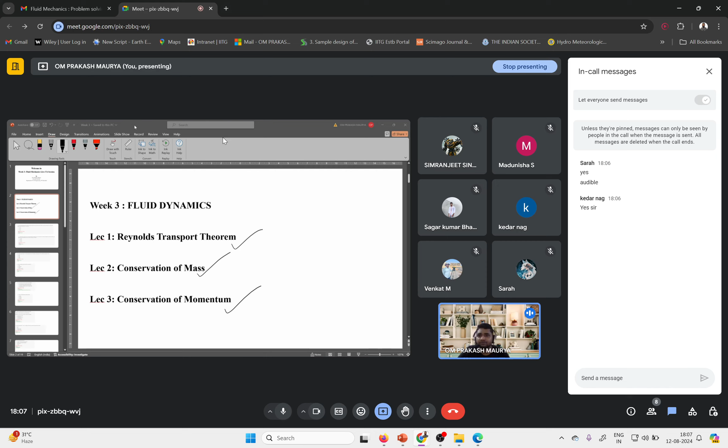So let me share the question and answer first. Hope question 1 is visible to all of you. The control system focuses on a blank, on control volume focuses on a blank, filling the blanks.

So here option A and B are given. Option A: set of fluid particle in the first blank, and region of space surrounded by control surface in the second blank. Option B: region of space surrounded by control surface in the first blank, and set of fluid particle in the second blank. So please, based on your understanding of week 3 content, try to give the answer of this question. You can write the answer in the chat box whether option A or B is correct.

Here the question is about control system and control volume. This is the very basic thing which belongs to your Reynolds transport theorem. So if you have any idea, please write in the chat box. I think sir has explained very well what is control volume and control system in the class or NPTEL online classes.

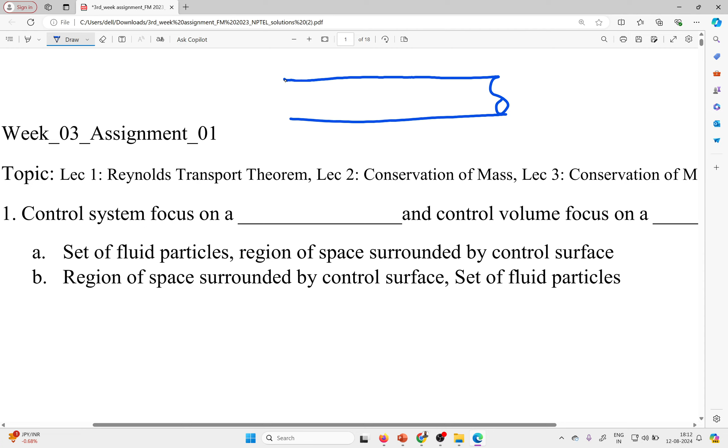Okay, let me discuss the answer. So basically a control system and control volume is nothing but, let me draw a pipe first. Let me select the pen first. Okay, so if I draw here a pipe, why it is like that? And a student wants to calculate velocity at this particular point, so there are two ways of calculating, and water is flowing from this side to this side.

So let's suppose this is point A. So velocity at point A, what is the value of velocity at point A? There are two ways. First, this water particle is moving, you need to track a particular set of particles as it moves to this place, and you need to calculate velocity. So this is one way.

Second way, you focus on a particular region. Let us suppose you select a region. When fluid particles come at the particular point, lots of fluid particles go in and out from this particular region. So you need to focus only on this region, not move from inlet up to that point, and you can measure velocity in that section only. So this is another way to calculate.

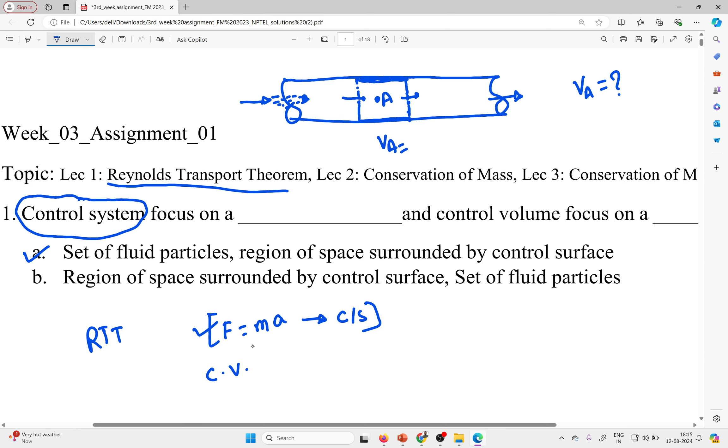Your Reynolds transport theorem, what does it do? Whatever your fundamental equations are given, like force equals mass into acceleration, this is based on your control system. But in fluid mechanics, generally we use the control volume approach. So how will we use this formula? This formula is converted from control system to control volume using RTT. So you can say control system is converted into control volume by RTT, Reynolds transport theorem. Always please remember this concept. So this is all about your control system and control volume. Hope you people got what I was trying to say.

Let us move ahead with the next question.

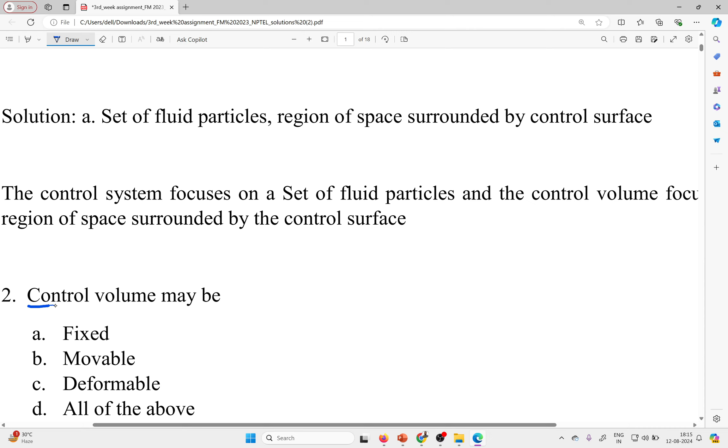So okay, question 2 is: control volume may be fixed, movable, deformable, or all of the above. So this is the second question. Please try to give your answer based on your previous lectures, for question number 2.

Okay, Sagar is telling option D. Okay. Other students, please also try to say. All students have 2 minutes. Within 2 minutes, please try to give the answer to this question. Okay, Kedar is telling option A. Okay.

I want to say one thing more about the control system approach. In a control system, fluid identity should not be changed. Fluid identity means whatever group or set of fluid particles you have considered, those particles should not change. In a control volume, one particle comes in, another particle goes out, so the identity of particles is changing. But in the control system, whatever group of particles you selected previously should not be changed. So this is the fundamental concept behind control system and control volume.

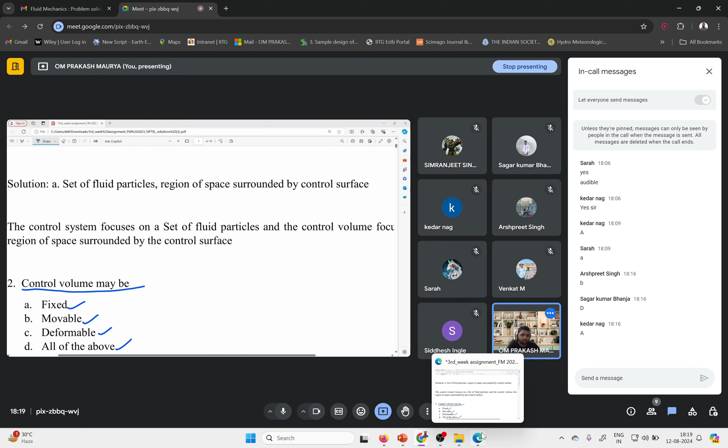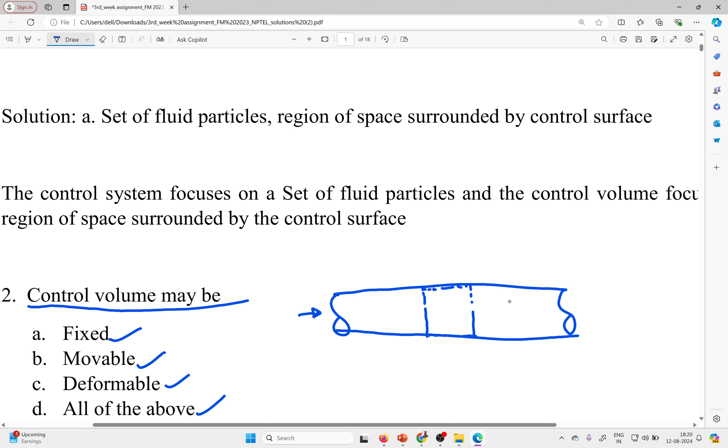So only two students answered. Okay, let me discuss. So control volume may be fixed, like in the previous questions. Let me draw. You may select a region here. Maybe your region is shifted from here to here also. It depends on which type of study you want to do. If you want to move your control volume, then it is possible. After time t1, after time t2, your control volume may be shifted here.

But in a control volume, new particles are coming in and going out, not like the control system. It may be deformable. The shape is like this here, and maybe the shape will be different here. It depends. So all options will be correct for that.

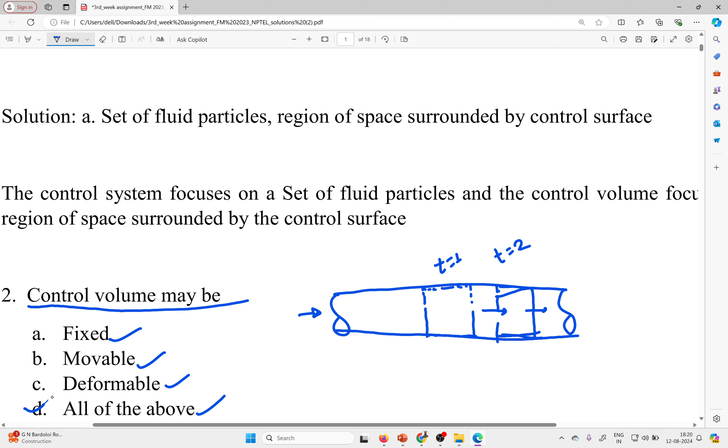Let me discuss the control system. Your control system also may be deformable, may be movable. It is movable, but it may be deformable also. If your group of particles is like this, after some time, after traveling a certain distance, it may be like that. So your control system is also deformable.

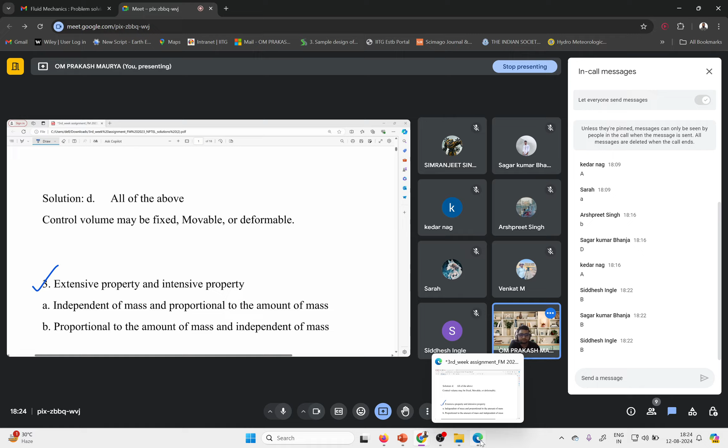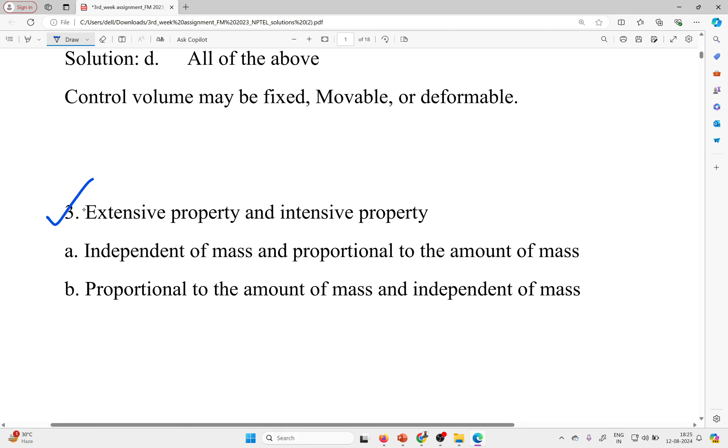So your extensive property depends on your mass. Your extensive property is, as the name suggests, extensive and intensive. Extensive means it is proportional to, it depends on mass, and intensive means it is independent of mass.

Like your density, rho, it is independent of mass. Weight depends on mass because weight is equal to m into g. Density is equal to m by v. So in the formula mass is there, but it is independent of mass.

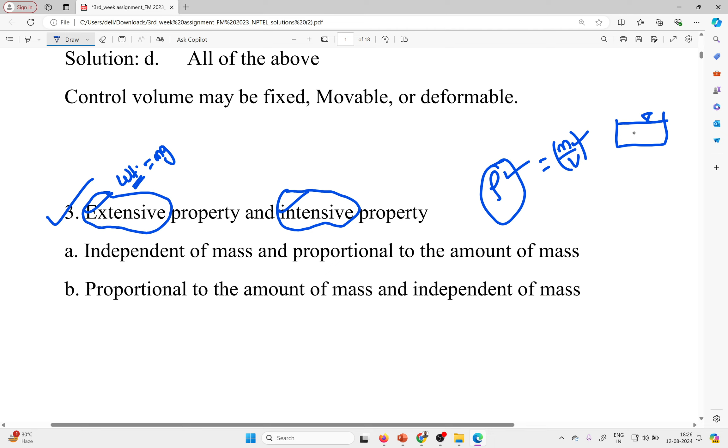Because without mass you cannot expect weight, but density, whatever water you take, let's suppose 100 liter, or you take 1 liter, your density will be the same: rho of 100 liter H2O and rho of 1 liter H2O, density will be the same. So remember, and you can read the explanation also, it is written very well.

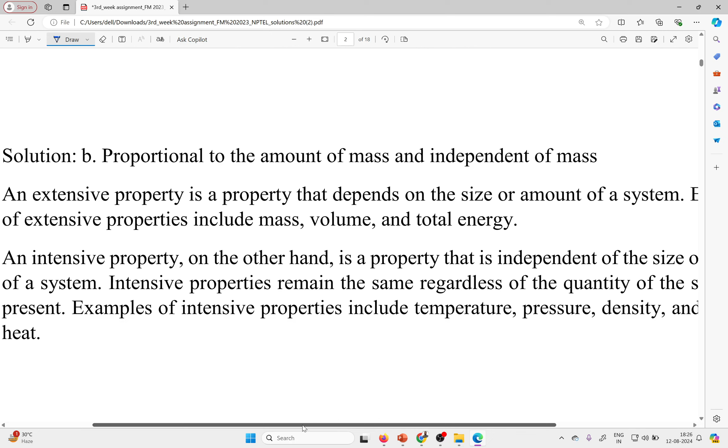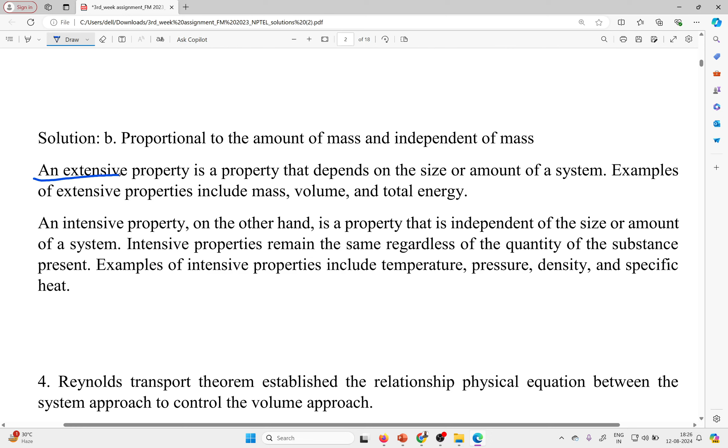So okay, an extensive property is a property that depends on the size or amount of the system. Examples of extensive properties include mass, volume and total energy. An intensive property, on the other hand, is independent of the size or amount of the system. An intensive property remains the same regardless of the quantity of substance present.

Example, whatever I have given, the example of H2O. Examples of intensive properties include temperature, pressure, density and specific heat. So hope you understand.

So now the next question is: Reynolds transport theorem establishes the relationship between the system approach and the control volume approach. So question number 4. Please try to give your answer in the chat box for question number 4.

Hope everyone got the previous question's answer. Okay. Sagar is saying option A. Okay. Just a few minutes back I gave some explanation about this question. So I need the answer from everyone. Please write your answer in the chat box, because just a few minutes back I explained the Reynolds transport theorem and the system and control volume. So really I need the answer from everyone.

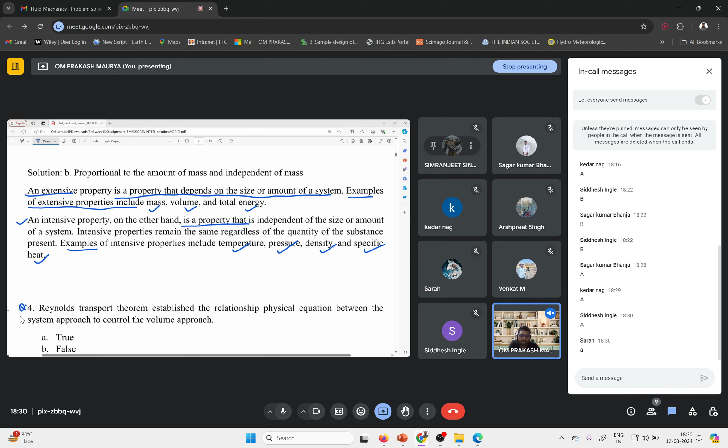Okay. Kedar is also saying option A. Other students please also write your answer. Okay. Siddhesh is saying option A. Okay, everyone is saying option A, which means option A is correct, because a few minutes back I explained it. So we'll move ahead to the next question, question number 5. But if you want to read the detailed answer, what is actually written:

The Reynolds transport theorem establishes the relationship between the derivative of an extensive property of a system, remember, an extensive property depends on mass, and the derivative of the same property within the control volume. It provides a way to convert between Lagrangian and Eulerian approaches. Let me discuss here for a few minutes.

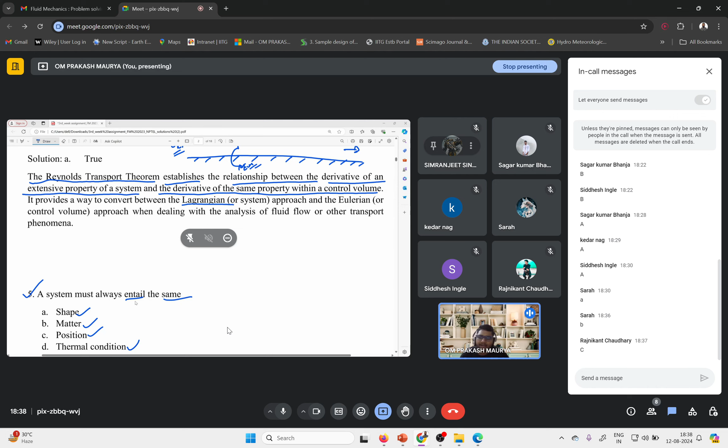So let me discuss the answer of this question. A few minutes back I was discussing the same thing, the control system. If you want to measure a velocity at a particular point or anywhere, in the system approach you will select a group of particles, and the identity of this group of particles should not be changed. The same group of particles is moving here, the same group is at this particular point, not another group; no other particle is going inside this set of particles.

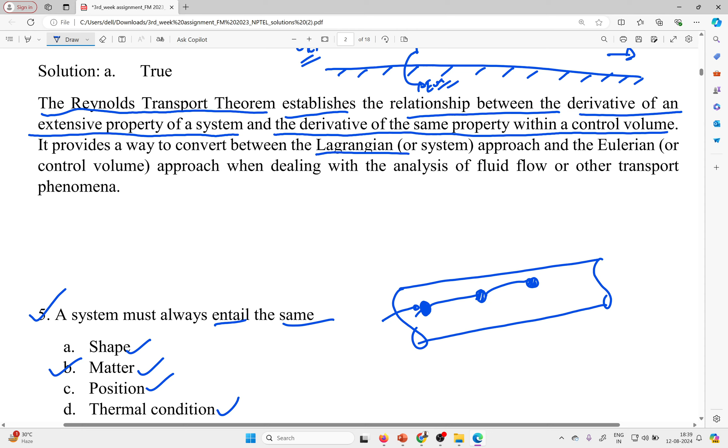So the system must always entail the same matter. Remember please, position may change. Shape may also change. I was discussing previously also, the control system may change the shape. Thermal condition definitely can change. So option B will be correct. Remember always. So let me move ahead to the next question.

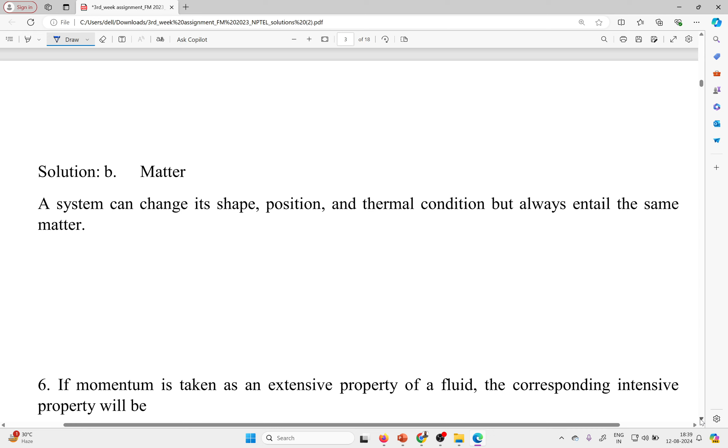Next question is about extensive property or intensive property. If momentum is taken as an extensive property of fluid, the corresponding intensive property will be what? If you know the formula of momentum and what is extensive and what is intensive, which I just discussed, you can link that concept with your momentum formula and easily give your answer. Which option will be correct: mass, energy, velocity, or power, A, B, C, D?

So please write your answer. Please read the question very carefully, then try to give your answer in the chat box. Okay, Rajnikant is telling option A. Sarah is also telling option A. Okay. Other students, please also try to give your answer.

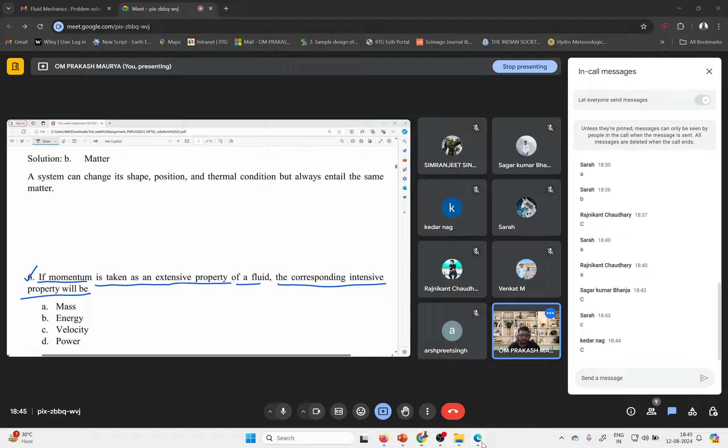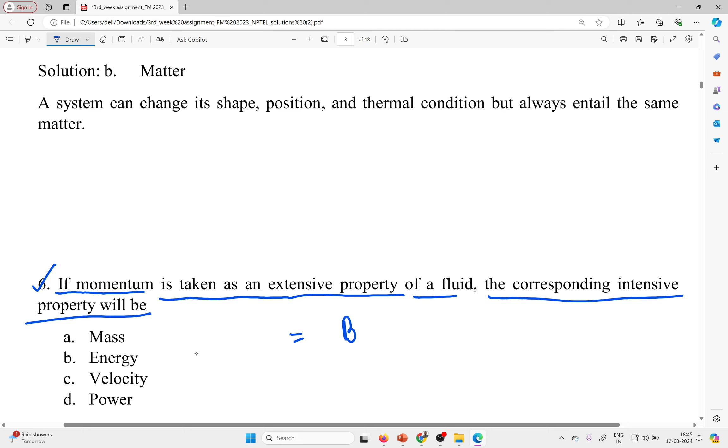Okay, let me discuss. What is extensive and intensive? Let us suppose a property B is an extensive property. What will be the intensive property? Intensive means independent of mass. If any property has mass, you need to divide that property by mass, then you will find that property as an intensive one. If you have an extensive property B, when you divide B by mass you get beta. This will be free from mass.

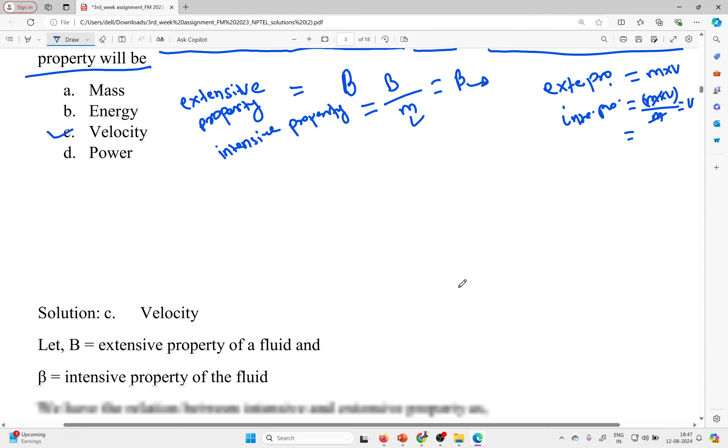So similarly, your extensive property given is momentum, mass into velocity. So the corresponding intensive property will be mass into velocity divided by mass, which gives velocity. So the intensive property of momentum is velocity. Option C will be correct. Everyone is correct. Now moving ahead to the next question. Here is the explanation.

The next question, number 7, is on the momentum conservation principle. The momentum conservation principle is based on the physical principle of: zeroth law of thermodynamics, Newton's first law of motion, first law of thermodynamics, or Newton's second law of motion. Please everyone try to answer. You have three principles: mass conservation, momentum conservation, and energy conservation. Always remember what principle each is based on, and what is the physical meaning of all three conservation laws.

Everyone has 2-3 minutes. After 2-3 minutes I will discuss the answer, so in between please write your answer in the chat box. Okay, Kedar is telling option D. Other students, please. Venkat is telling option D. Rajnikant is also telling D. Arshpreet is telling D. Okay.

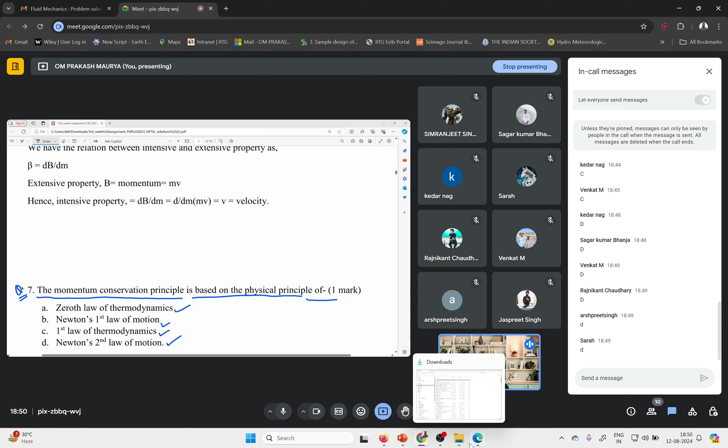So now moving ahead on the next question. The continuity equation, this is a very basic question. The continuity equation is based on the conservation of... you have only 1 or 2 minutes to answer. Please give your answer very quickly. Which option will be correct?

Okay, Kedar is telling option C. The answer of this question I want from everyone please. Everyone please write the answer. The continuity equation is based on the conservation of energy, momentum, mass or force.

Okay, everyone telling C. Kedar, Sarah, Jaspreet, other students please. Okay, Venkat is also telling option C. Sagar also telling option C. Okay. So everyone telling option C.

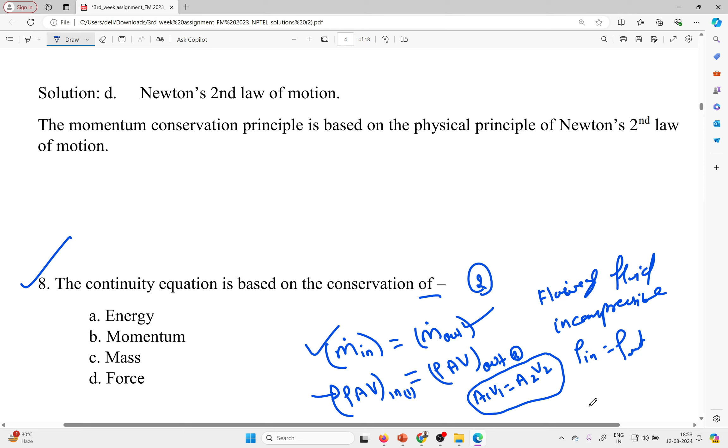So now moving ahead on the next question, question number 9. The continuity equation is valid for only compressible flow, only incompressible flow, both compressible and incompressible flow, or neither flow. Please try to give the answer of this question, as I have just previously discussed.

So if anyone... okay, Kedar is telling option C, no, okay, Kedar is telling option B. So if anyone listens to my words very carefully, then you can very easily give the answer. Okay, Kedar is telling B, Sarah is telling C, Kedar and Sagar is telling B, Venkat is telling B.

So if you people previously listened to my words very carefully, then you can easily give the answer without any mistake. By the way, I will explain again whether it will be valid for compressible or incompressible. I am waiting for another student also, write your answer. Okay, Venkat is telling option B.

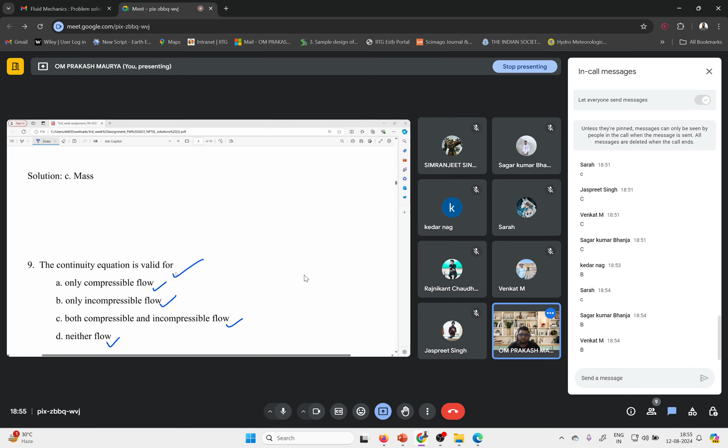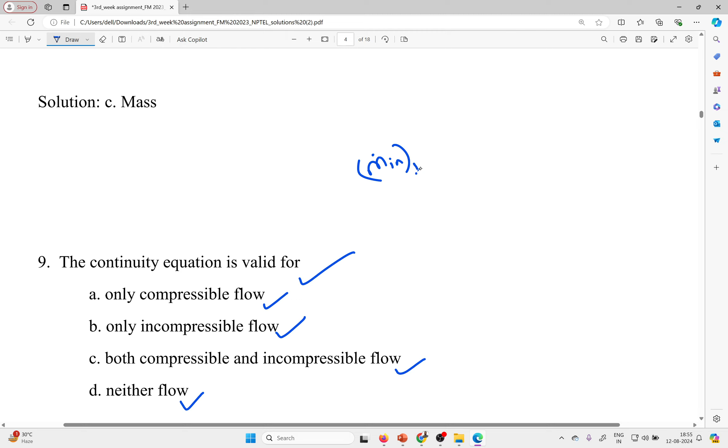Okay, now I want to explain. So what I discussed previously: mass flow rate in, I can give the subscript 1, and mass flow rate out, I will give the subscript 2. So here you can write rho1 A1 V1 is equal to rho2 A2 V2. So this formula is valid for what?

When your rho1 is different for in and rho2 is different for out, it means if density is changing from in to out, it means compressible.

And if your fluid is incompressible, rho1 is equal to rho2. So this equation you can also use for incompressible, because rho1 and rho2 will cancel out. So this is valid for both compressible and incompressible. Remember always please. So option C will be correct for question number 9. Hope you people got it, what I am trying to say.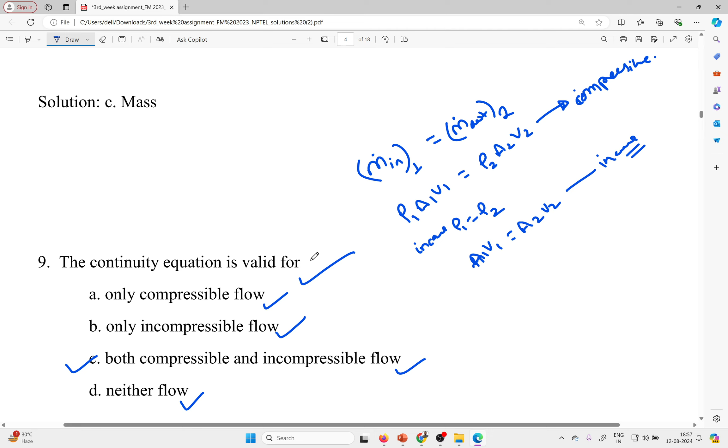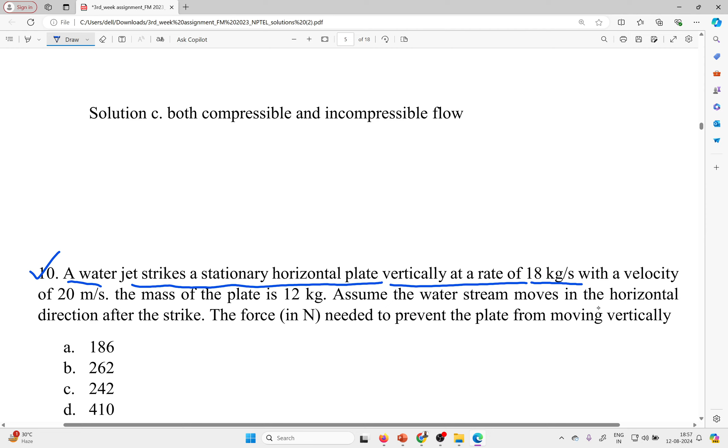So now moving ahead on the next question, question number 10. This is a numerical type question, so please, for this question you have 5 minutes. Question 10: A water jet strikes a stationary horizontal plate vertically, of 18 kg per second with a velocity of 20 meter per second.

The mass of the plate is 12 kg. Assume the water stream moves in the horizontal direction after the strike. The force in Newtons needed to prevent the plate from moving vertically. So which option will be correct? A, B, C, D. Please, I need the answer from your side.

So please everyone give your answer in the chat box. Which option will be correct?

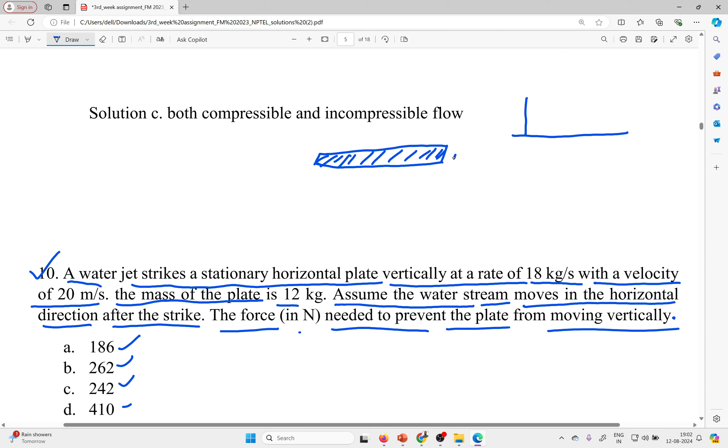Let us suppose the plate is stationary here, drawn like that. The mass of this plate is given as 12 kg.

A water jet strikes the plate, and water is moving horizontally on both sides, with a mass flow rate, rho AV, given as 18 kg per second. Assume the water stream moves horizontally, as I have drawn here.

We need the force needed to prevent the plate from moving vertically. So this is the force we need to find, the force that will prevent the plate from moving vertically due to the water jet force.

So how will you calculate this? Upward force is your jet force. Downward force is the mass of the plate, its weight, plus the applied force. So you can write the equation like that.

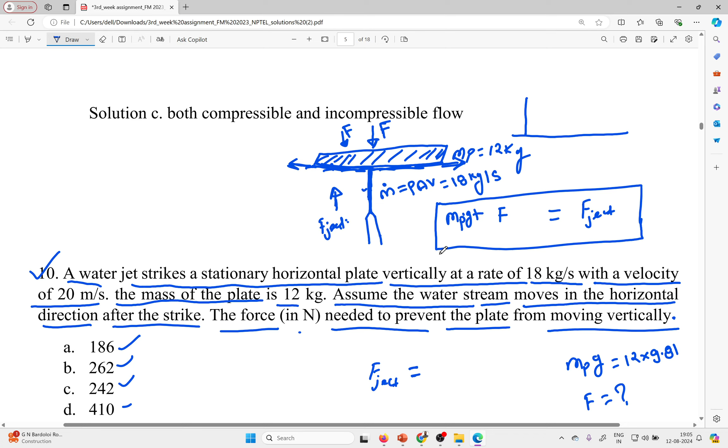You can see here, velocity is given as one piece of data, 20 meter per second. So what is the force of the jet? Jet force is mass into velocity. Mass into velocity means what here?

This is the mass flow rate. The actual formula of force is mass into acceleration, but you can write this formula as mass flow rate, that is mass by time, equal to m dot, into velocity. So this formula is here.

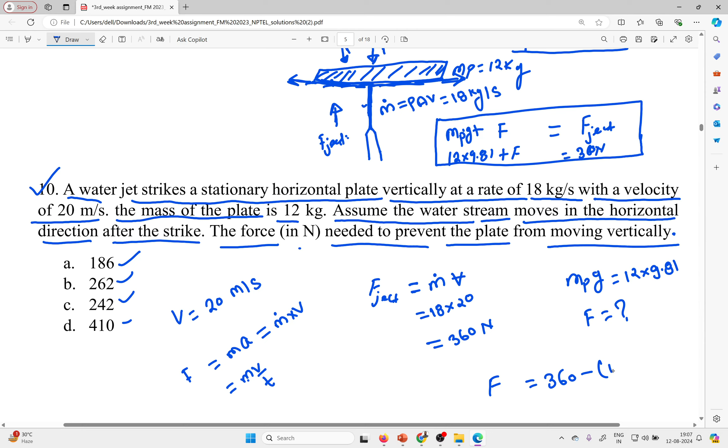Mass flow rate is given as 18, into velocity given as 20, so it is 360 Newton. So here you can easily calculate: 12 into 9.81 plus F is equal to 360 Newton. So F is equal to 360 minus 12 into 9.81. When you calculate that, you get the answer: 242.28 Newton.

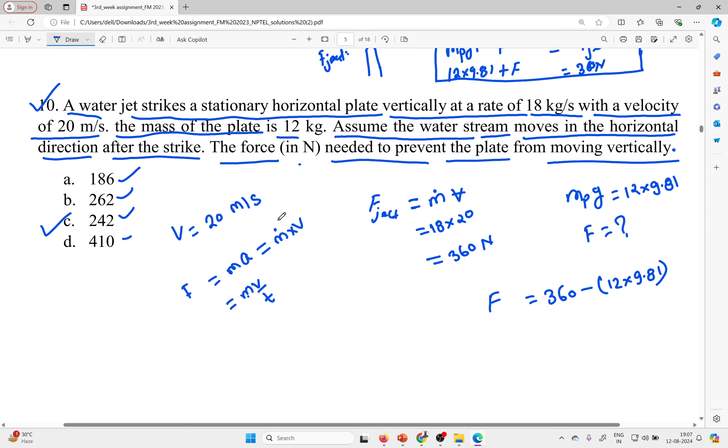So you will get option C, option C will be correct for that. Now moving ahead with the next question, I'll show you question number 11, then after I want to take a break of 5 minutes.

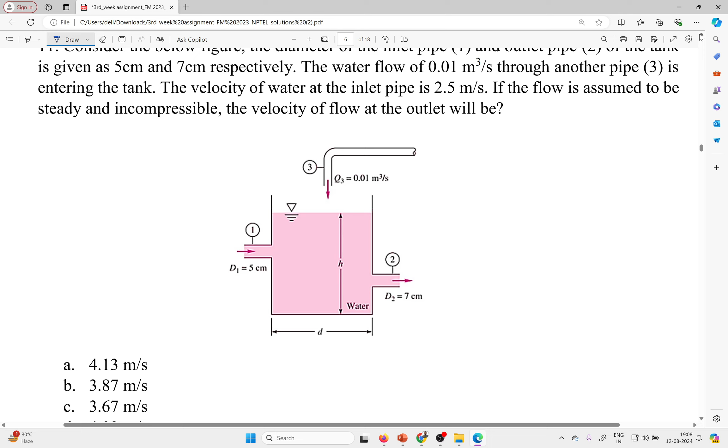Okay, maybe the option will not be visible. Don't worry. So question number 11 is this. Please read the question, or if you want to take a 5 minute break, you can also take it. After 5 minutes, we'll move ahead with question number 11.

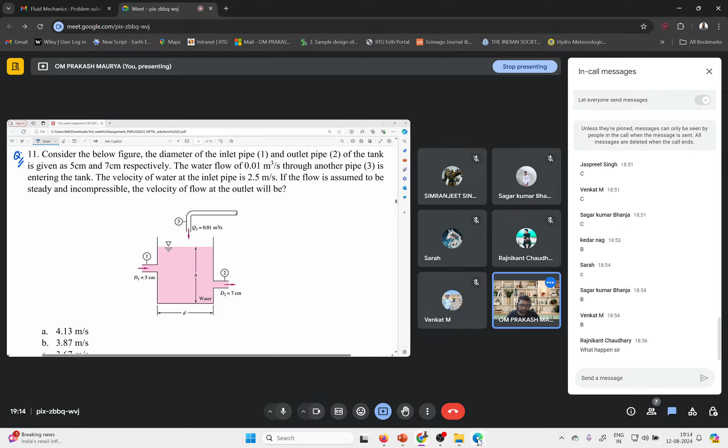Now I want to read the question. Question number 11: consider the below figure. The diameter of the inlet pipe 1 and outlet pipe 2 of the tank is given as 5 centimeter and 7 centimeter respectively.

The water flows at 0.01 meter cube per second through another pipe, pipe 3, which is entering the tank. So it means here there are 2 inlets you can expect. One is Q3 and another is Q1.

The velocity of water at the inlet is given as 2.5 meter per second, so V1 is 2.5 meter per second. If the flow is assumed to be steady and incompressible, it means this formula is valid. Incompressible means the velocity of flow at the outlet: if V1 is inlet velocity, then we can write V2 as the outlet velocity.

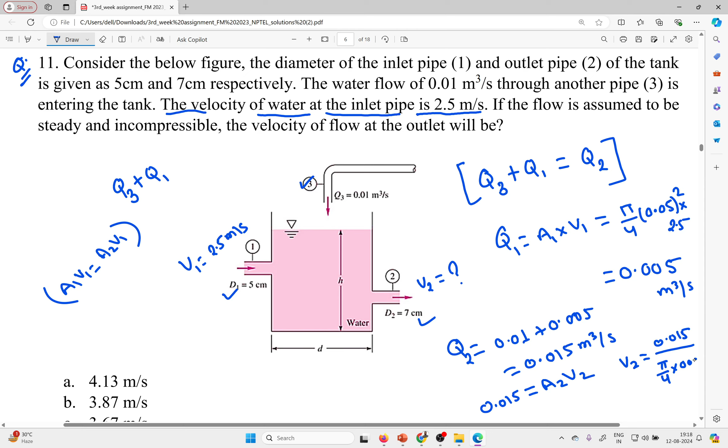0.07 whole square, so it will become around, divided by 0.015 divided by pi by 4 into 0.07 square. So it is coming around 3.8 meter per second. So this is option B will be correct for that.

So you can calculate like that also. Hope everyone got it, what I was trying to say. If you got it, please write in the chat box yes, otherwise I will explain again. If anyone wants explanation, you can write in the chat box, or you can write if you got it, write yes.

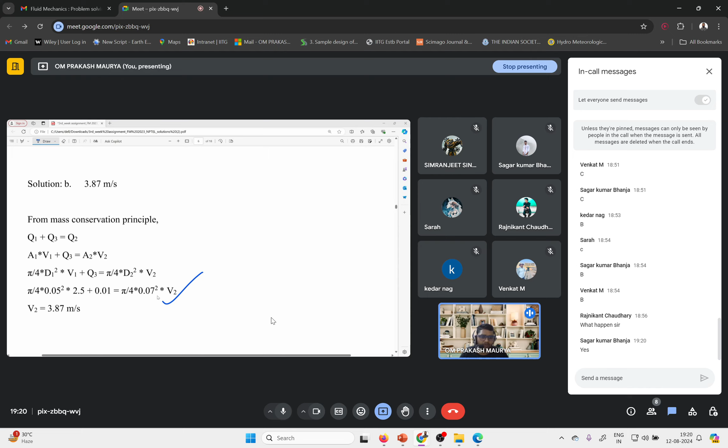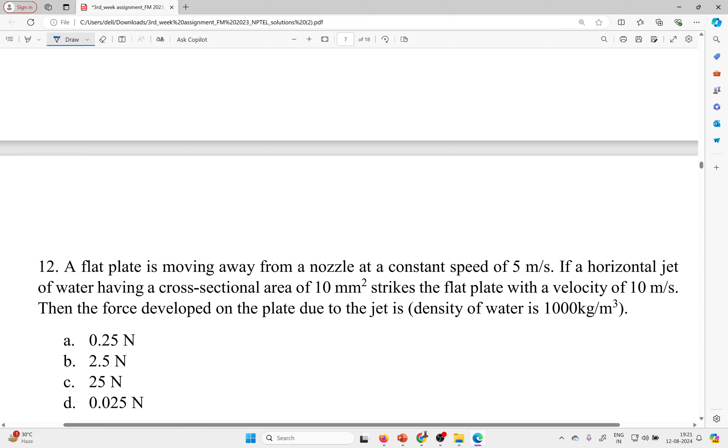Okay, now moving ahead with the next question. A flat plate is moving away from a nozzle at a constant speed of 5 meter per second. A horizontal jet of water having a cross sectional area 10 mm square strikes the plate with a velocity of 10 meter per second, then the force developed on the plate due to the jet is. You can consider the density of water 1000 kg per meter cube.

So please, option A, B, C, D is given. Please try to first take the attempt, then I will discuss with you what is the correct answer. So everyone please think on that.

If your plate was stationary, then you can simply write the formula m dot into velocity, or you can calculate very easily. But here your plate is also moving, so in that case how will you calculate?

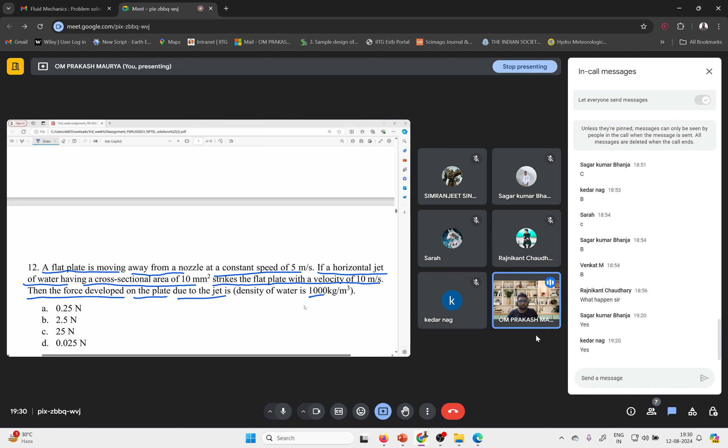Okay, now I want to discuss. So the concept here is nothing but, what is force? Force is equal to mass into acceleration, this is simple. But you can write it also as mass flow rate into velocity. So here the plate is moving and your jet is moving also, so it's mass flow rate into your relative velocity. So what is mass flow rate? Mass flow rate is nothing but, let me write here, rho AV. So rho AV means what? This is also your relative mass flow rate. So here it's rho A V relative square.

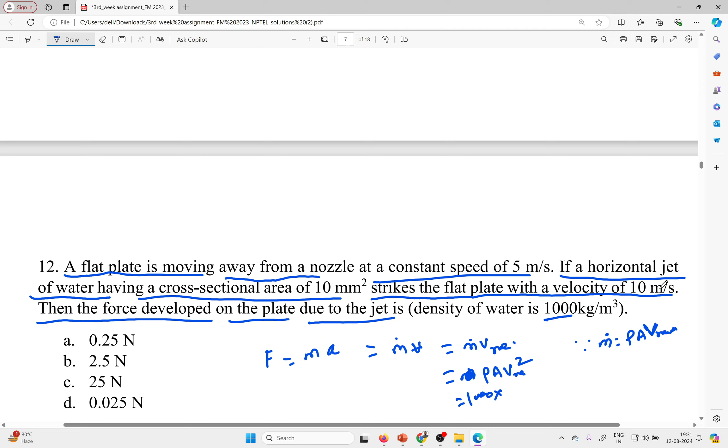So now you put the formula: 1000 into area of jet. What will be the area of jet? That is your 10 mm given, pi by 4 into d square. And then you calculate with the velocity, you will put here velocity, that is 10 minus 5, so 5 square, and you will get the answer easily.

So now I will show you the calculation part. Density is 1000, area pi by 4 into, let me show you how you will calculate. Force is equal to rho A into V relative square. So 1000 into pi by 4 into d square, 10 mm is given, so 10 into 10 to the power minus 3 like that. So this is area and V relative 10 minus 5, so 5 square. So it will become around 0.25 Newton. So like that you can easily calculate.

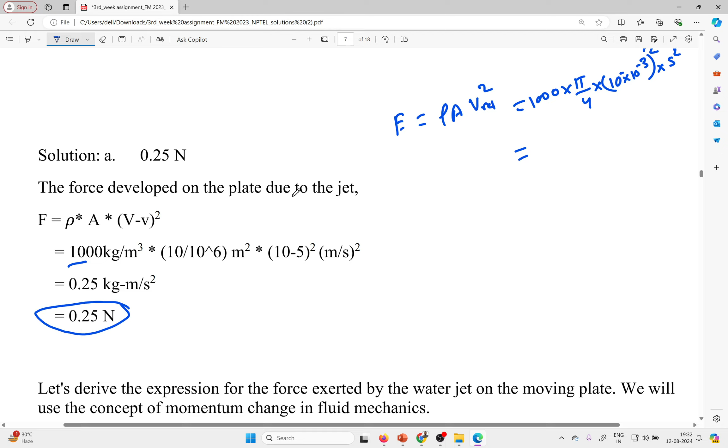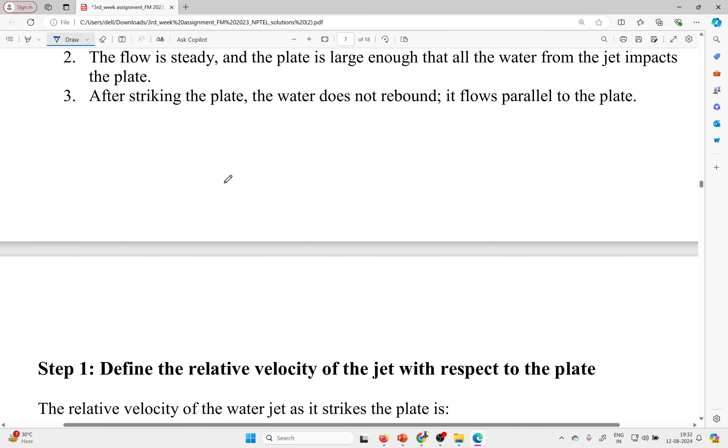Option A will be correct for that. So here the explanation is given, very well. I will upload this question, not in YouTube, in the Google Doc, so you can get it from there.

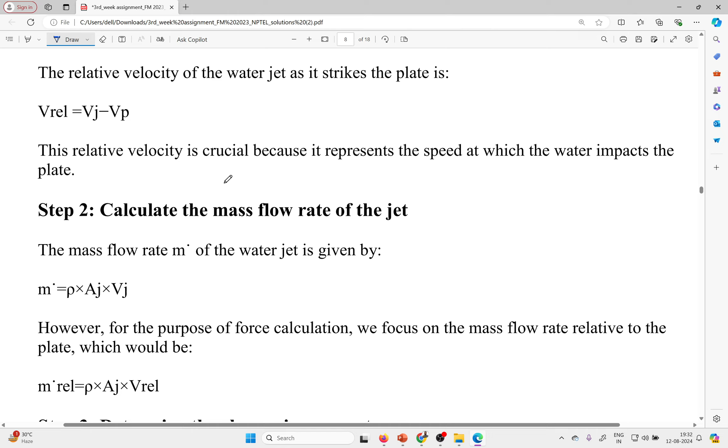So you can read one by one. Question number 13: in a normal adult, the average speed of blood through the aorta, the radius of aorta is 8 mm, is 0.33 meter per second. From the aorta, blood goes into major arteries, each of radius 4 mm. If the speed of blood flow through the arteries is 0.044 meter per second, calculate the number of arteries.

This is a very basic question, just based on your analytical mind. You can give the answer easily based on your reasoning - how you are thinking about this problem and what your approach should be. So please try to give your answer within 5 minutes.

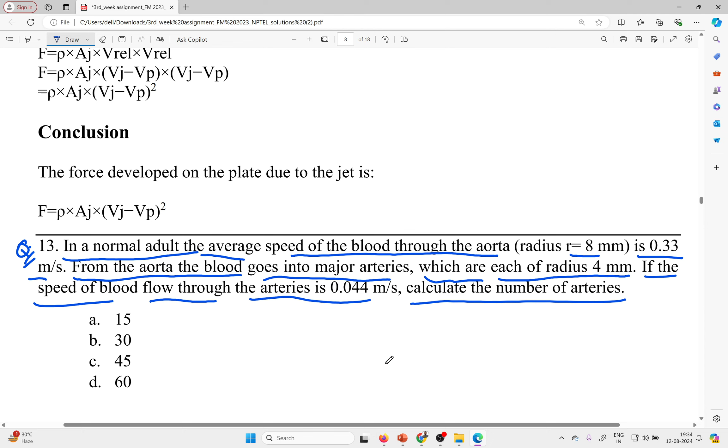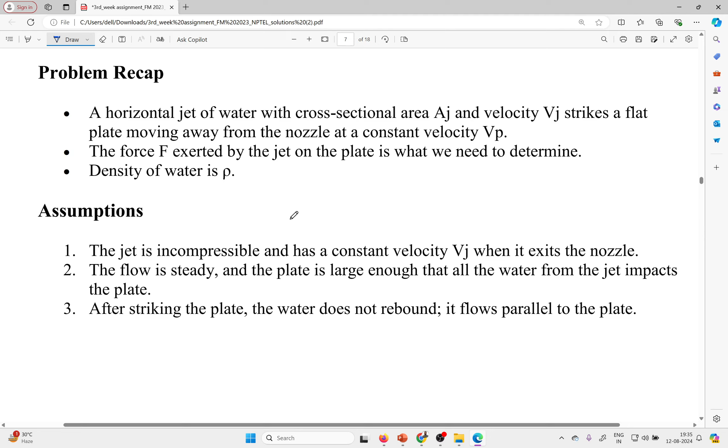Cross section is given - oh, in the previous question cross section is given. Okay let me see the question. Cross-sectional area is directly given, that's why here writing 10 into... okay, now got it, not in diameter. So you will not write this. You cannot write also 1000 into area, it's already given as 10 mm square. So you can write 10 mm square as 10 to the power minus 6, and your 5 square, then you will get 0.25.

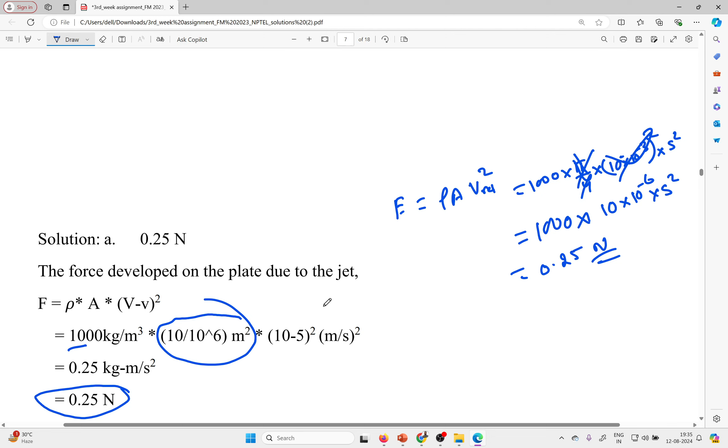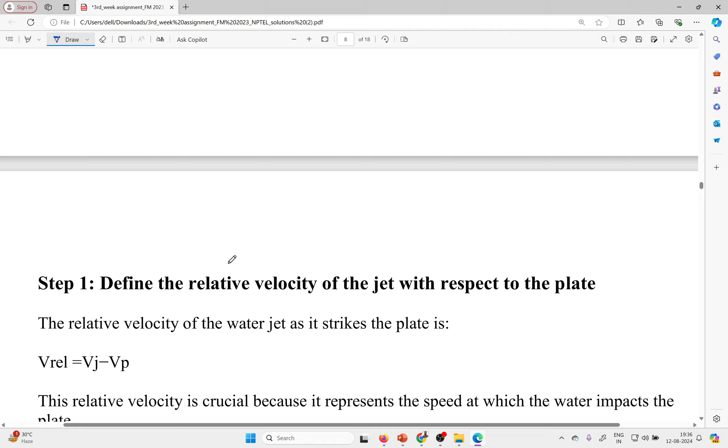Okay, thank you for addressing. Now let me show the question. Okay, so this question - now please try to solve this question. Sarah is telling option A. Other students, please also take attempt. Very basic question.

This is based on conservation of mass, just for a hint. Okay, other students please also write your answer. Sagar is telling option A. Two students are telling option A.

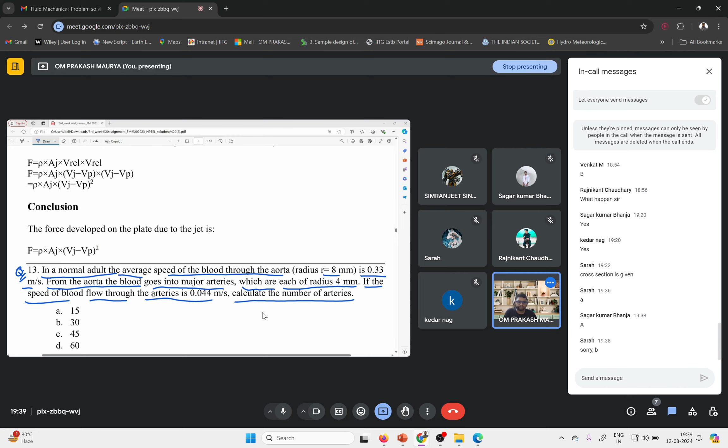Okay let me show you, let me solve. Sarah is telling option B. Let me show you how you will calculate. So here you will apply Q in and Q out. So Q out, I think in arteries.

Area into velocity of arteries, and here aorta radius is given as 8 and velocity is given as 0.33, using pi r square. I can write here in mm, no problem, because both sides are in mm. So 8 square - here n you need to calculate. Area is given as pi r square, so 4 square.

Velocity is given in meter per second, and here velocity is also given in meter per second, so 0.044. So n is equal to - pi cancels - so 0.33 into 8 square divided by 4 square into 0.044.

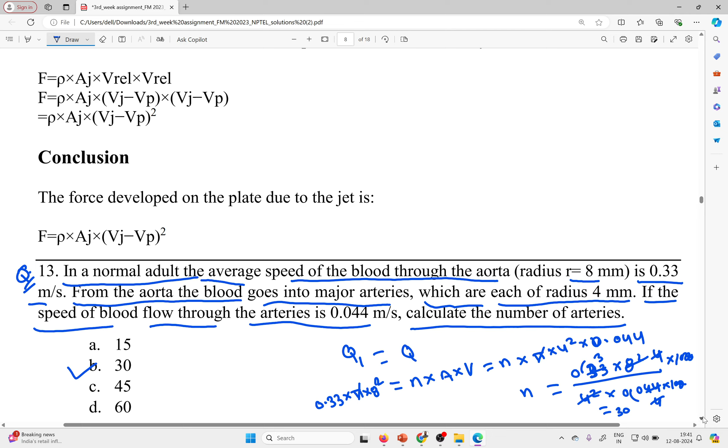A circular jet of water emanating from a nozzle strikes a stationary vertical plate normally. The force exerted is measured as 635 Newton. If the discharge from the nozzle is measured as 42.4 liter per second, estimate the diameter of the nozzle at the exit in centimeter. Remember please.

So please try to give your answer. You have 5 minutes for this also. Please try to solve. Please try to give your answer. Let me... or you have 1 minute more if anyone wants to write.

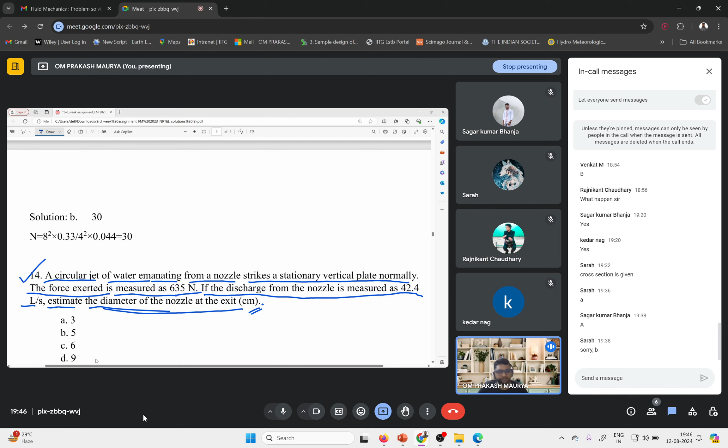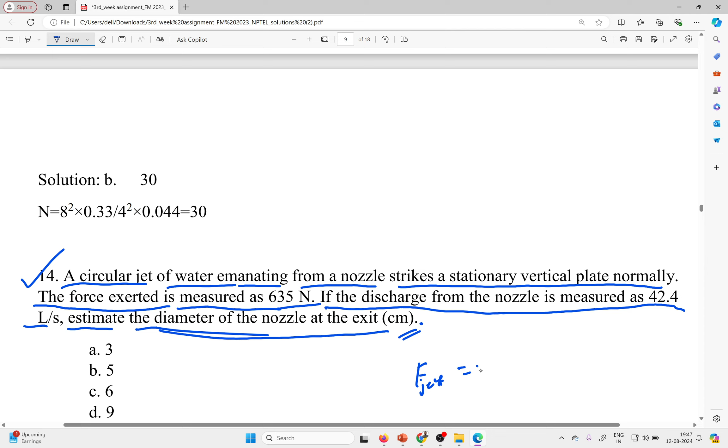So let me show you the answer of this question, how you will calculate. Your force is equal to what - force of jet you can write here. A stationary vertical plate - what does stationary mean? You will not use the relative velocity concept like the previous question. So your m dot into your velocity is rho a v into velocity.

So here water means density 1000, and discharge is given, meaning this value AV is given. So 42.4 liter per second you can write in meter cube by multiplying by 10 to the power minus 3. So this is meter cube per second.

Only velocity remains, and here 635 is given - you can calculate velocity from here. Now your discharge is equal to area into velocity, so area is what? Discharge divided by velocity, which equals pi by 4 into d square. So you need to calculate d square from here. Hope you got what I am trying to say. So your d square is equal to 4 into discharge divided by pi into velocity.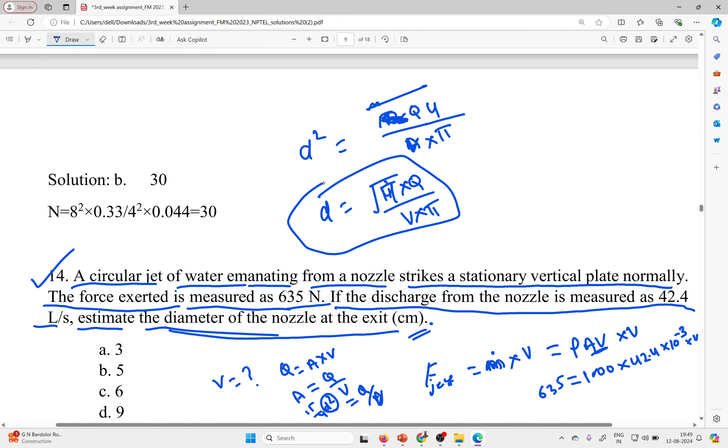So d is equal to root under, or 4 here also. Am I doing a mistake anywhere? Okay, 4Q pi will this, not here, so 4Q divided by velocity into pi. So you can calculate very easily like that. So let me show you, here you can see how you will calculate.

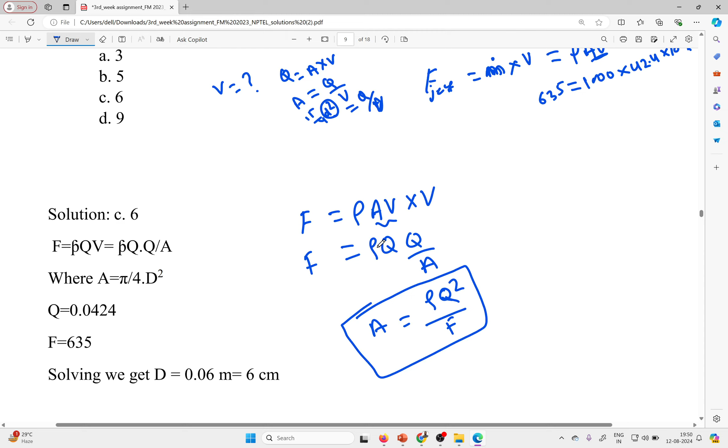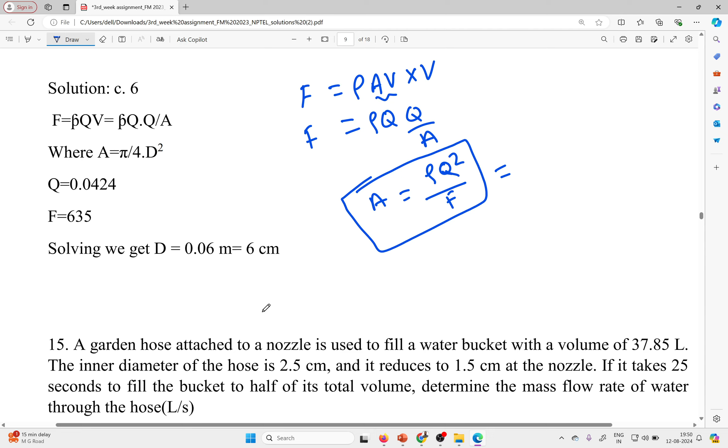Now moving ahead with the next question. So rho A into velocity. So you can write rho, this will be Q, and write as Q by A. So your area is equal to what? Rho Q square by F. No need to move with this because this is a little bit long process, so this is a very easy process. But here you also need pi by 4 and d square, so you will do all these things and get the answer 6 centimeter. Option C will be correct for that.

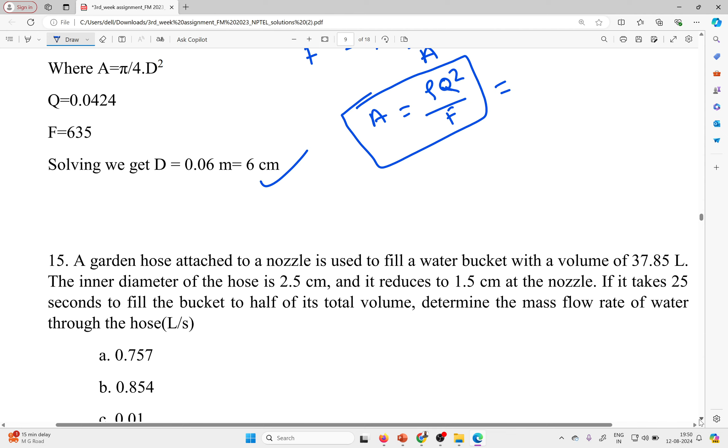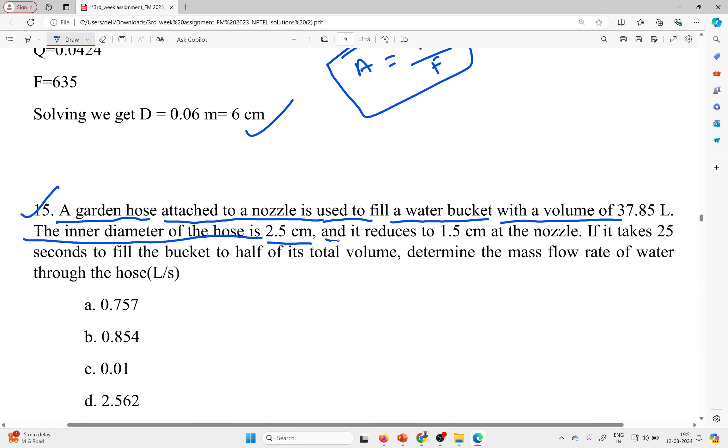Now question number 15. Question 15 is given: a garden hose attached to a nozzle is used to fill a water bucket with a volume of 37.85 liter. The inner diameter of hose is 2.5 centimeter and it reduces to 1.5 centimeter at the nozzle. If it takes 25 seconds to fill the bucket to half of its total volume, determine the mass flow rate of water through the hose. So you need to calculate the mass flow rate through the hose. Based on the above question, please try to solve this, and write the answer of this question.

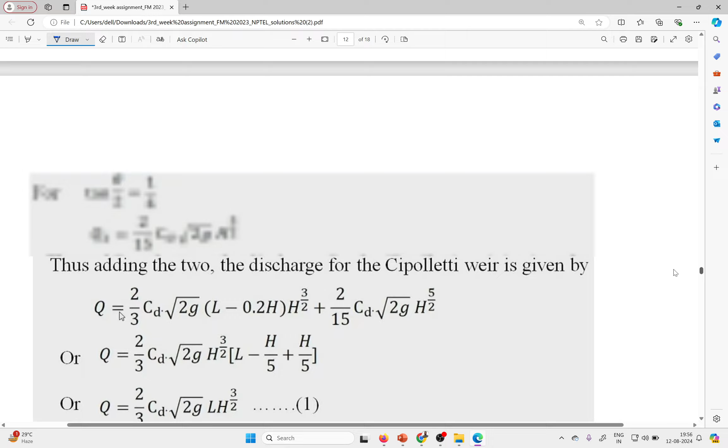So here the question is: a garden hose attached to a nozzle is used to fill a water bucket with a volume. The volume of your bucket is given, total volume 37.85 liter. The inner diameter of hose is 2.5 centimeter, and it reduces to 1.5 centimeter at nozzle. If it takes 25 second to fill the bucket half, in 25 seconds, how much volume is filled? Volume filled half, that is 37.85 divided by 2, volume filled within 25 seconds.

Determine the mass flow rate of the water. Mass flow rate means nothing but rho A into V. Rho AV means rho into area into length and time, like that. So you can write this as rho volume into time. That is your volume. Or area, how will you calculate area? Pi by 4 into 0.015 square, so this is the area. And volume, how will you calculate? Volume is given already, 37 point this much. So based on that, how will you calculate your discharge?